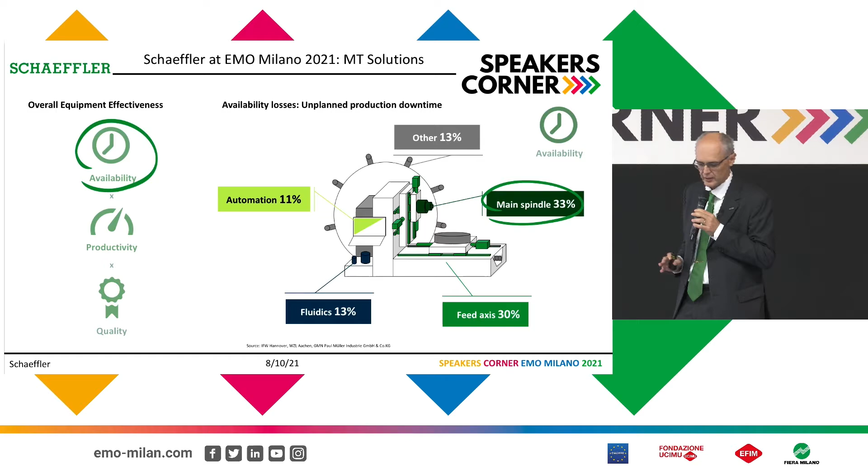The statistics of our machine tools all around the world in our plants say that approximately 33% of the availability losses from unplanned production downtime is generated by the main spindle, and 30% by the feed axis. Let's concentrate a little bit on the main spindle.

If we refer in detail to the main spindle, approximately 42% of the damages are related to the bearing, in particular because of collision damage, lubrication failure, contamination, and wear.

And we need also to optimize the productivity, increasing the robustness and the speed shiftability of the spindle itself. We need to optimize the performance of the spindle bearings in order to optimize the performance of the spindle itself. Which is our proposal at EMO 2021?

We prepared a new series of spindle bearings that we call M series, which we are proposing in completely steel versions, such as steel rings, steel balls, hybrid ceramic balls together with steel rings, and the new high-performance steel named Vacrodur for really impressive performance increase for your spindles.

Vacrodur in particular allows bearing designs that shift performance to a new limit. The VCM, as we present this bearing on the market, is a new premium level for the spindle bearing. It's the new premium level bearing that we are proposing, offering to the market.

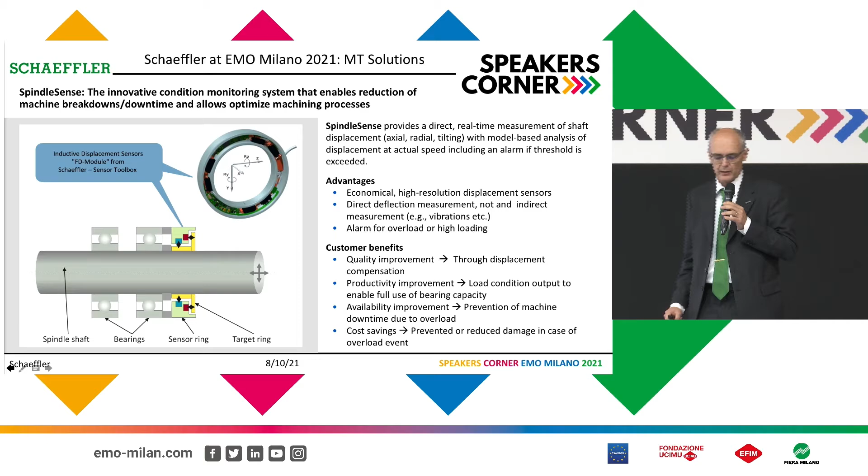A second solution that we are presenting at our booth is the Spindle Sense, an innovative condition monitoring system that enables the reduction of machine breakdowns or downtime and allows optimization of the machining process.

Spindle Sense is a sensor, you can see at the bottom of the slide, located between the tool and the first bearing. The Spindle Sense is composed of a inductive displacement sensor that allows the user to monitor the deflection of the shaft.

With Spindle Sense, the customer is able to monitor the displacement of the shaft, axial, radial, and tilting. The advantage of this sensor is first of all a quality improvement.

Because monitoring the displacement, we can offer a monitoring of the quality of the machining. A productivity improvement because we can monitor the load of the spindle and so increase or reduce the speed of the cutting parameters as a function of the efforts on the shaft itself.

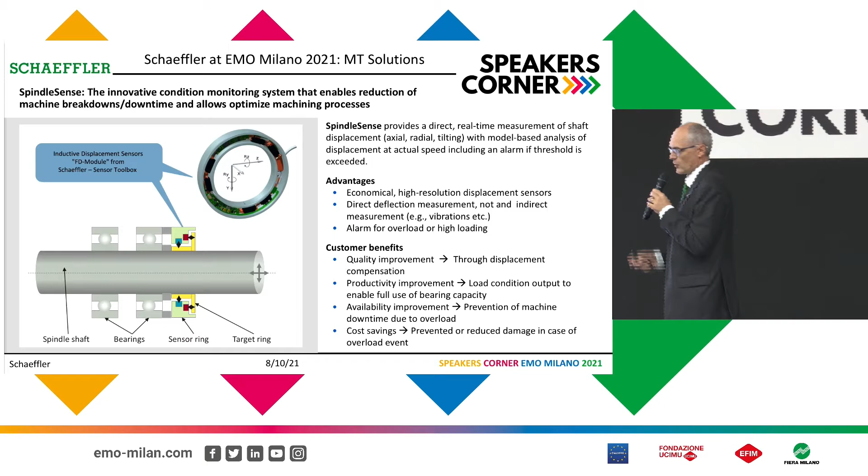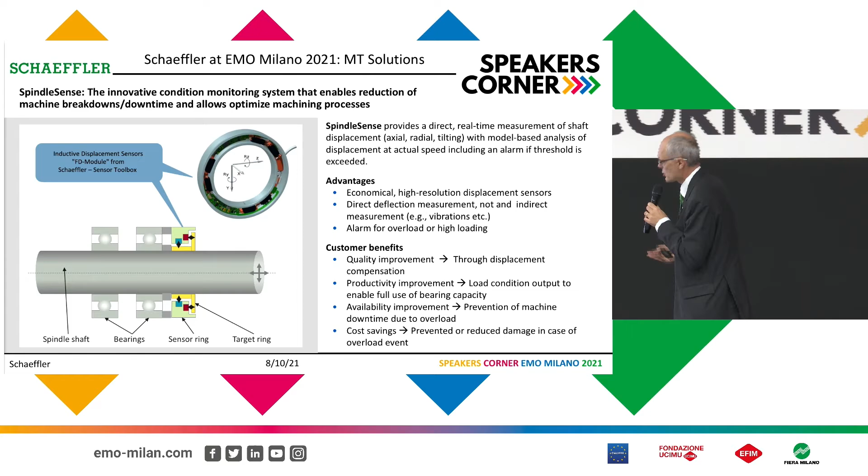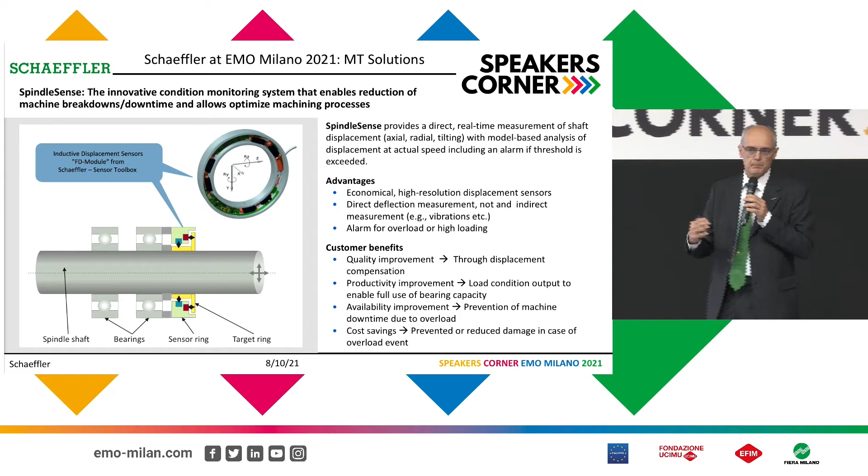Improving the availability because we can optimize the cutting parameters, and cost savings because we can prevent or reduce damage in case of an overload event. We can monitor the displacement in case of overload, such as an impact, and decide whether to start or not the spindle, preventing potentially higher damage.

Second area of development is the feeding axis. In particular, at EMO Milano 2021, we are presenting the RUE-F, the sixth generation of linear recirculating roller guidance systems, with optimized running force, optimized sealing and lubrication, and optimized assembly technology.

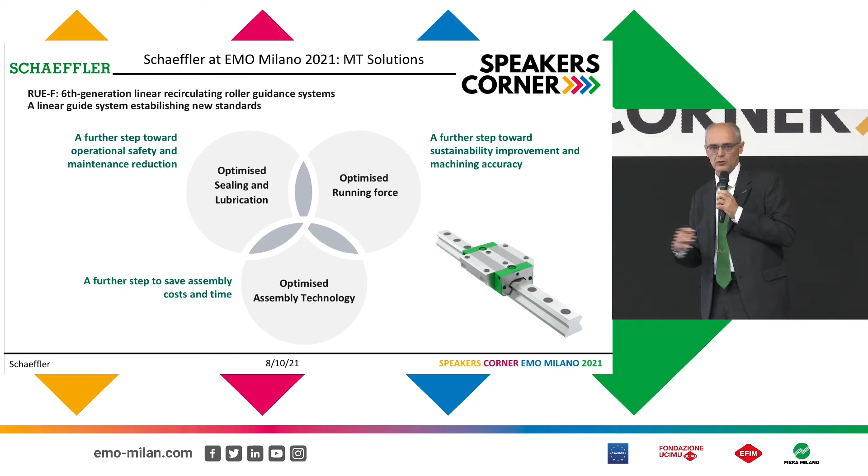This is a further step toward sustainability improvement and machining accuracy. You can feel that with the new RUE recirculating guideways, the normal friction of the guideways is significantly reduced, so the accuracy and machining performance can be improved.

Together with the RUE, we are proposing a condition monitoring system for the lubrication of the linear guideways. The name is Schaeffler DuraSense, and it is a device based upon an accelerometer system together with a data logger unit that can monitor the vibration of the carrier.

It can verify if the vibration increases beyond a certain level. The lubrication can be pumped because the monitoring is based upon vibration in the lubrication area. So as soon as the lubricant expires, we can command a new input of lubrication inside the carrier.

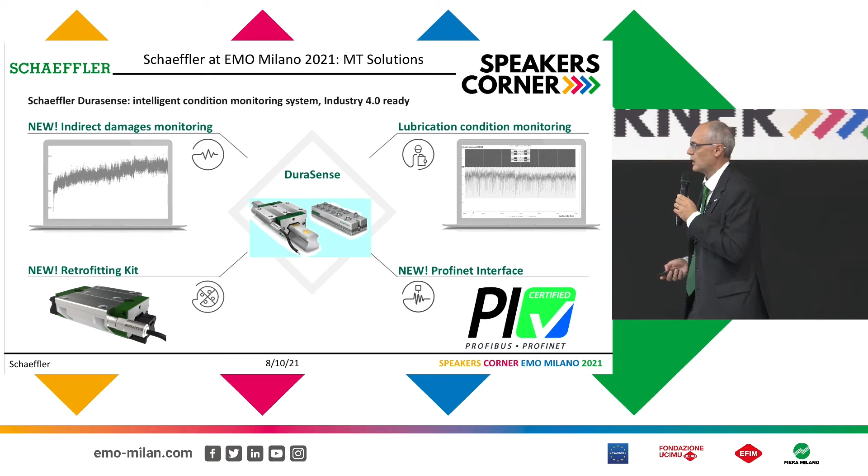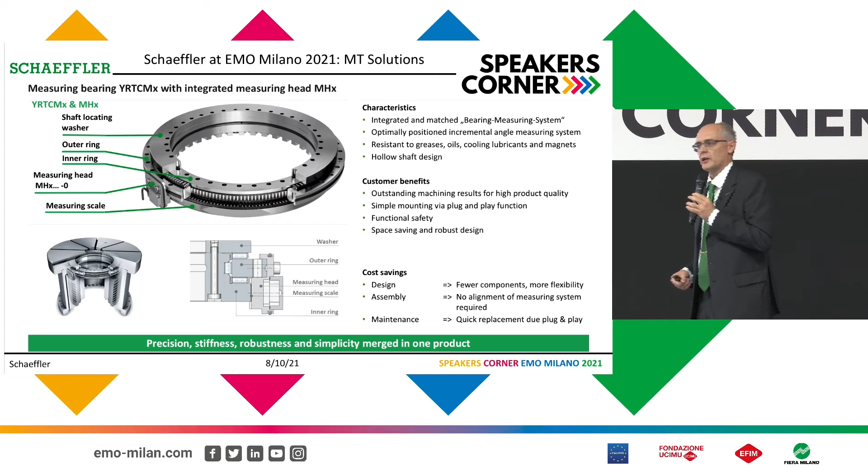Also in the machine tool solution, we are presenting the YRTC bearing, our traditional 3-row needle roller bearing for rotary tables, equipped with the measuring unit directly integrated on board. This bearing is proposed in 2 variants: YRTC-MA with absolute measuring system, or YRTC-MI with incremental measuring unit, depending on the requirement of the machine tool manufacturer.

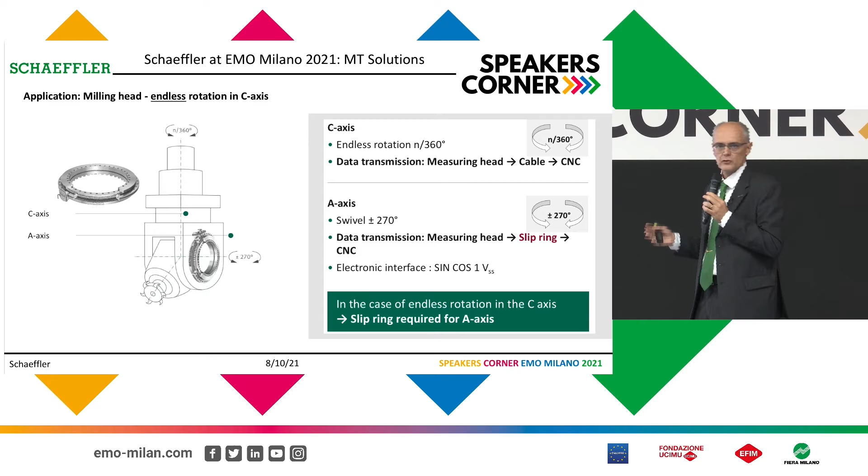This bearing can be used both on rotary tables and on 5-axis machines, both in the pulse and in the final axis, or in the spindle orientation axis. Due to the fact that the bearing is able to measure in 360 degrees, the full circle, it can be used both in swiveling axis or in continuous rotation axis.

Let's move to the second part of our booth. We are concentrated in advanced technology for machine tool, but also in service solutions.

The main topic we are proposing at EMO Milano 2021 is the system architecture for condition monitoring for the bearings. Not only for the bearings, because every kind of rotating, operating machine generates vibrations, and it's possible to acquire this vibration and monitor the trend, understanding the health of the machine itself. We decline our proposal in the condition monitoring world with 3 main device families.

OPTIME sensors are mostly designed for devices rotating at more or less constant speed, such as electrical motors, fans, pumps. For the manufacturing area, maybe the auxiliary systems of a production plant.

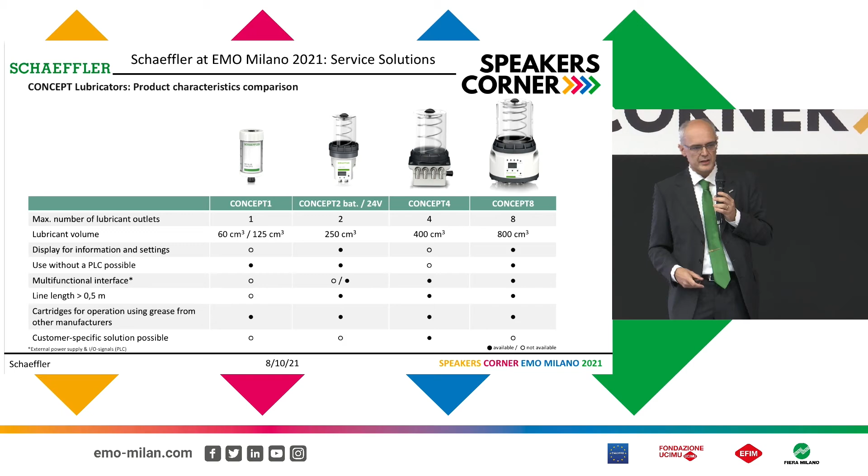Up to the Concept 8, the more complicated one, with 8 independent channels able to dispense grease or oil, depending on the version, with cartridges inside where the lubricant can stay protected from the external environment and dirtiness, as far as the user purchases Arcanol grease from SCHAEFFLER.

Last but not least, our proposal at EMO Milano 2021 goes into the robotics field. Together with our marketing service, we are monitoring the numbers of the robotic world, and we saw that robotics is booming, in particular in the field of collaborative robots, or cobots.

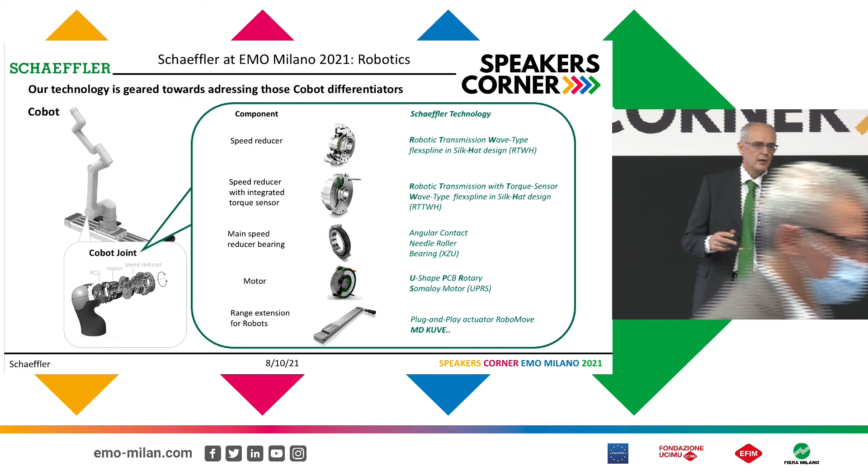Our proposal here at EMO Milano 2021 is, for sure, always in the field of bearings, because SCHAEFFLER is a bearing manufacturer as a core business. In the center, an angular contact needle roller bearing named XZU is able to guarantee to the pulse or knee of the robot a good rigidity, an exceptional rigidity, with very contained minimum rotational angles, because of the needle roller bearing technology where SCHAEFFLER for sure is market leader.

We are presenting also, at the top of the slide, the speed reducer that we call RTWH, a harmonic reducer in conjunction with ball and needle roller bearing technology, a ready-to-use unit. Together with the new U-shape PCB rotary motors, named UPRS, that are direct drives with axial flow, able to guarantee strong torque and power density in a very limited space.

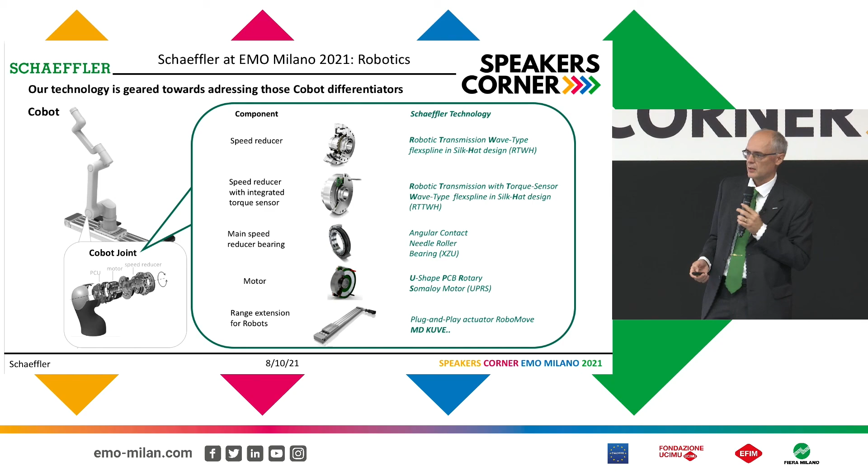And again, taken from the traditional INA technology, a toothed-belt driven MD KUVE linear module able to be used as a plug-and-play RoboMove, a range extension linear module for robots, where the robot can be carried up and moved in order to increase the range of motion of the device, of the robot itself.

That's, in 15 minutes, what is our proposal, our novelties, our new devices that we are offering to the market.